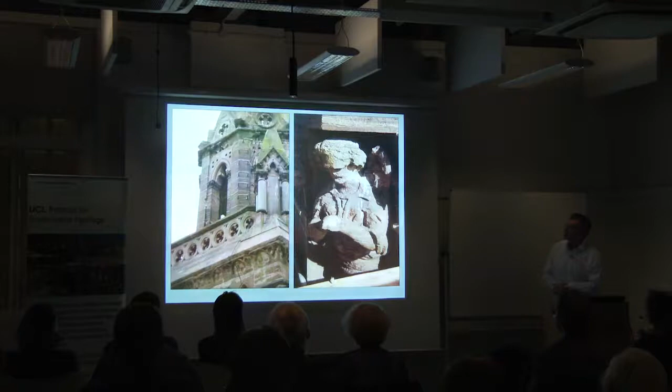And that was the state of the clock tower when we started work on it in around about 2000 or so. A lot of it's still that same Scrabo sandstone eroded away really, really badly. So we gave Albert a bit of protection just to keep him safe while we were working around him. Albert is Portland limestone actually, and that Portland limestone by comparison kept its carved detail and kept the sharpness very well. But we had to put back a lot of the detail on that which is gone.

So nearly all the carved stone that you can see here is new stone going back in, replicating the original stone, because that detail had been lost. But when it came to the main shaft of the stone, that's all the original stone within the building. And again, that was cleaned, repaired, and treated, and was fine once you went back beyond a certain surface. And again, that was subject to testing and trials for over a year before we actually started work. And Albert got his hood back as well to keep him dry.

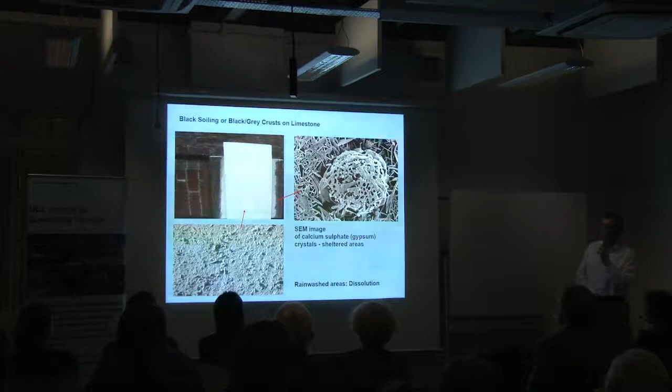And of course, different things happen to limestone, and where it's washed by rain, it tends to stay clean. In the rain-washed areas, you get a dissolution, so the surface gets pitting and worn, but it tends to stay clean. But you get these calcium sulfate or gypsum crystals growing on the sheltered areas where it's not being rain-washed off, and this sort of typical blackness is gypsum.

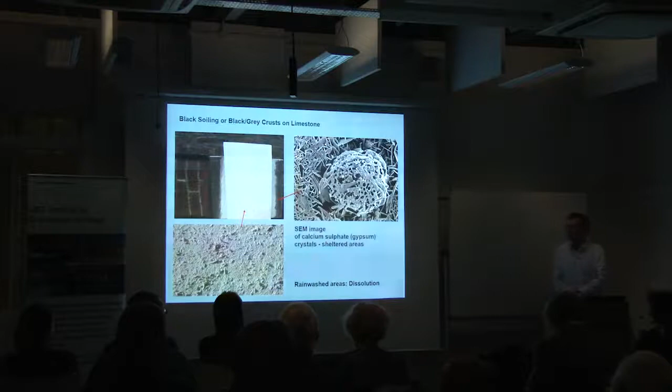And Belfast is not unique by any means, but it does have some local characteristics, and there's other cities around Britain and Ireland that have the same, but we have obviously heavy industrial pollution from the mid-19th century onwards. It's on the coast, so you get marine salts coming in as well. And then because it's also in a dip between two groups of hills, in winter in particular, you get anticyclonic high pressure systems with the air sitting still and not moving at all. And the combination of those is fairly extreme weathering of the stone.

And I'll not pretend to understand the science behind all of this, but this is broadly speaking what's happening to the stone. So effectively, it's sulfur dioxide, which is in the pollution. It reacts with the calcium. The calcium can either be in the stone or in the mortar as well, forming calcium sulfate, and that's the black crystals that you see on the surface of the stone.

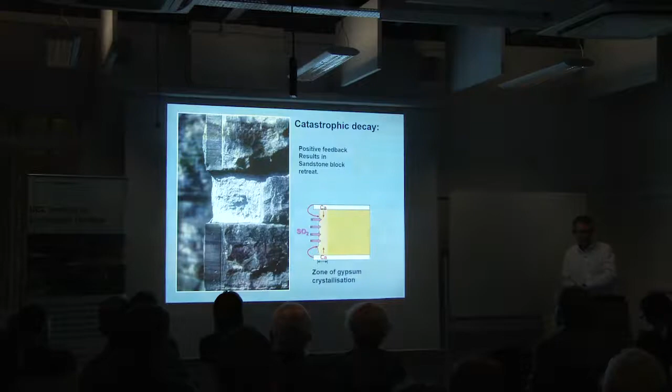And you get crystallization of that, which then starts to cause damage, and eventually that surface breaks away from the front, leaving a depleted area behind, and then you get fairly catastrophic weathering of that depleted area, and it sets up this cycle of damage. And it doesn't happen to all stones, but you typically get some stones which just keep weathering away, whereas other stones around them can be fine. So it can tend to have this sort of catastrophic retreat. And all this happens in very different ways in different areas.

So in rural areas, by which we mean a clean environment where you don't get the same atmospheric pollution, it tends to be just a gradual weathering, erosion of the stone, a gradual eating away of the surface, but not the catastrophic sort. The urban polluted area, that's where you start to get the black crust, the black crystals, the gypsum forming on it.

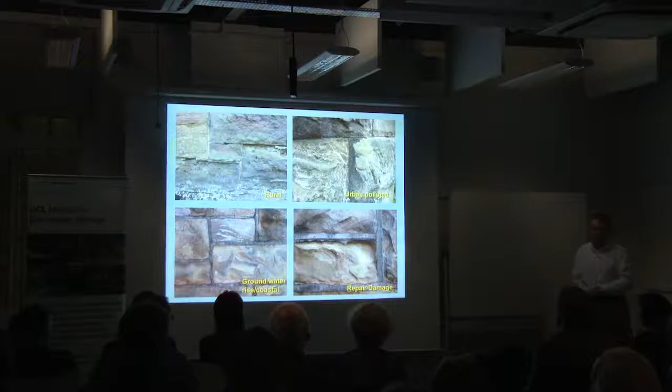But nearly one of the most typical types of damage that we deal with is bottom right-hand side, and that's where for many years, certainly from the 60s, 70s, 80s, even quite recently, people have been repointing buildings in hard cement-based mortars, mainly because they thought they were doing a good thing. It wasn't as if people were deliberately setting out to damage buildings, but it was seen as a way of protecting the buildings, to repoint them in hard mortar.

Quite often in what we call ribbon pointing, so a sort of thick layer of mortar behind it. And there are buildings all around the country which have been repointed like this. The softer the stone that they're repointing, the worse the damage is, but the damage is pretty catastrophic, really.

Because what happens is that the moisture within the stone and within the walls, and I'm going to talk a bit more about that in a moment, quite often comes out through the joints rather than through the stone itself. If it can't get out through the joints because you've got a hard cement mortar on it, more of it comes out through the stone, and therefore you get more of that breakdown of the surface of the stone as you get movement of water through that.

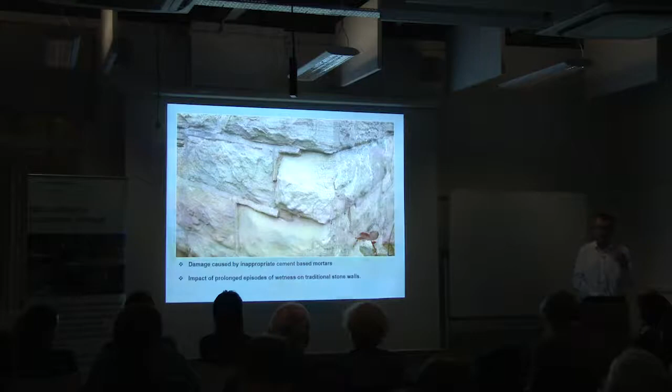And up and down the country, you will find walls like that which have been damaged by good intent, if you like, by people thinking they were doing the right thing, but in fact making it worse. And it still happens today, despite all the information and knowledge about it. You still see walls being repointed in hard cement mortars.

There's another typical sort of weathering that happens, in particular with these iron-rich sandstones. Giffnock is a Scottish stone, very heavily used throughout Scotland, but also a lot of it imported into Ireland and used there as well. And under acidic conditions, which of course again is polluted environments, the iron is mobilised to the surface. As it's doing that, it tends to what's called case harden this surface. It's iron oxide in the outer layer.

It's also characterised by staining of the stone, this sort of orangey red staining, and then you get this weakened layer just below the surface as well. In the thin section view below, you can sort of see what's happening to the crystals in the stone. And that again is very typical of sandstone weathering in polluted environments.

And this is, I suppose, an extreme example of it. The building we restored about 15 years ago now. You can see that complete breakdown of the surface of the stone. And there were choices in this case where we either replaced a large majority of the stone, or in fact, what we did was actually redress the original stone back beyond that depleted layer. So we, if you like, took a shaving off the face of the stone. We had to replace a lot of the carved elements, but the main bulk of the stone is still there.

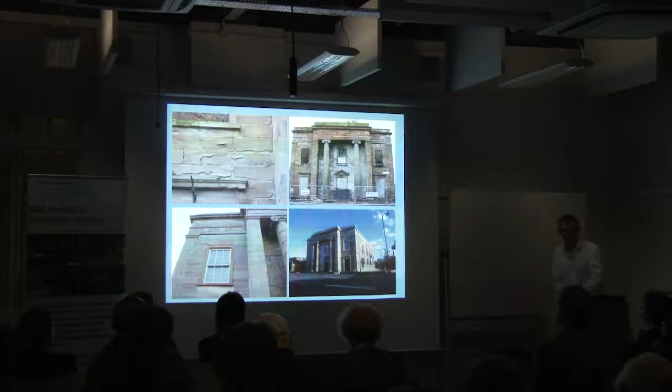You'd never describe that as really good conservation practice, but when you get extreme decay like that, you're really left with a choice of either replacing a lot of the stone or redressing the stone back. The building's back in use again as a school library, in fact, and keeps the water out as well.

And I suppose those are all early projects, but every one of them had an input from Bernie and his team into making decisions about what to do in each case. And at that stage, we were focused very much on the weathering of the stone and how the stone performed in the environment. And out of that came this project, the Northern Ireland Stone Database, which was our first KTP, between Queen's University and ourselves.

And really the purpose of that was to get information out to the public and out to the industry about what we were actually dealing with. So this is still now, 15 years later, a live database. On it there's details of every stone building in Northern Ireland, what the stone is, how that stone performs.

We also looked at all the quarries where that stone came from, both local quarries and imported stone as well. It's all linked together by stone type, by geographical area, by the architect and that. And the purpose of this database was really so that people understood what they were dealing with when they came to it. So if you started to work on a building, you had a source of information to know what the stone was, how the stone weathered, where you could get replacement stones, what were the suitable replacement stones when you couldn't get the original.

And that's been running now for the last, say, 15 years or so. And tied into that was the book that Joseph mentioned at the start, which is this one, which is intended really as a field guide for people working on stone buildings. Again, the purpose of this is recognition that a lot of people, architects, surveyors, builders, they were described as practitioners quite often, but we get hired for a job, and you go along, you do this job, and you're quite often under pressure from time.

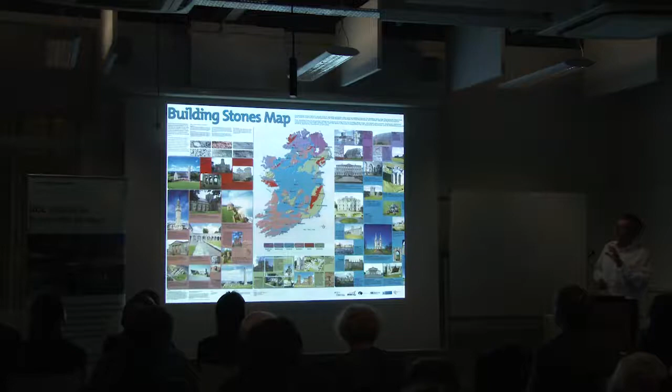And tied into that, this was another sort of side project, which was really back to this idea of linking geology with architecture. And this was a poster done for schools and universities at the time. And this was this idea that if you look around the historic fabric, it is a representation by and large of the geology underneath you. Not always the case, of course. People who had enough money imported stones from all over the place. But in most cases, the underlying geology is reflected in the architecture, and that link is so often lost as well. So part of this was encouraging quarries to reopen, stone to be used, and I'll talk a little bit about that later on.

But as I say, in the first number of years, we were concentrating really on this weathering process and the breaking down of the surface of the stone and what's happening and how to repair that. But as we went on, it became clear to us, and we probably should have picked it up much earlier, that really water movement through the stone is actually the crucial thing in all of this. And understanding how water moves through a building's fabric is actually crucial to understand how that building is going to weather, and also what you do with it to repair it as well.

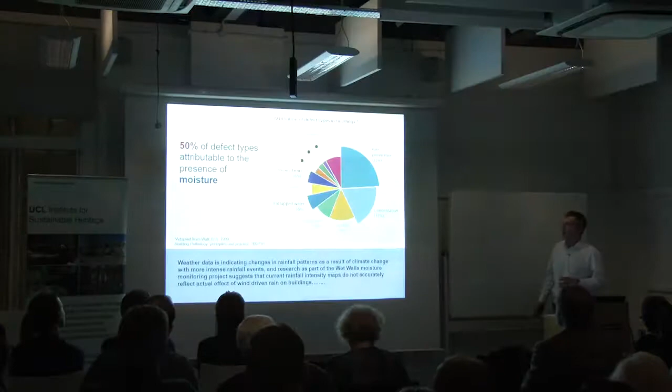So for the last 10 years or so, we've been focusing more on this idea of water movement. And part of that is because that's why buildings go wrong, they leak. And most of the things that people complain about are the fact that water gets in to your building. So 50% of all defect types in buildings are to do with water getting in. So that's the sort of background of why water movement is important.

But it's also, I suppose, been doubly important now because climate change is happening. It's real. We can see it. And one of the effects of that is greater intensity of rainfall events, tied in quite often with greater wind speeds as well. When we look at the weather data for Northern Ireland in particular, the actual total amount of rain falling isn't necessarily changing that much at the moment, but the intensity at which it hits buildings is increasing, and that is having dramatic effects on buildings.

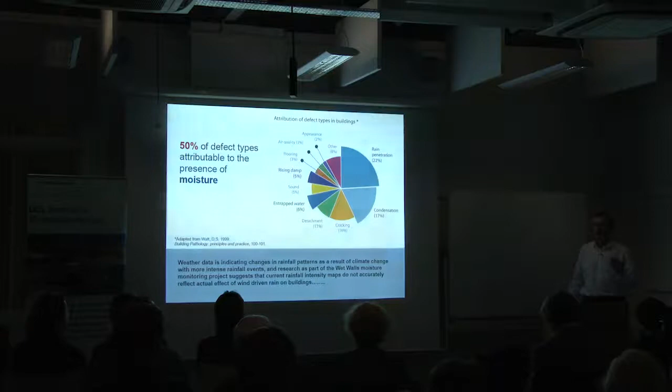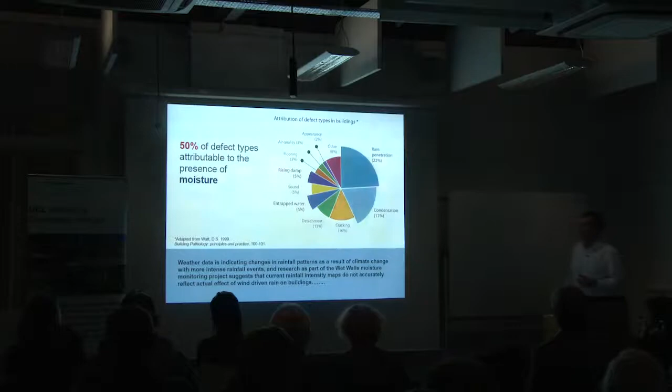Buildings which have never leaked before, historic buildings, are now leaking. Water is getting through, and new buildings are suffering from that as well. So we've been involved again for the last 10 years or so in more and more projects to do with trying to understand that process of water getting through, and that's what Scott's working on at the moment, is one part of that.

But leading up to that, I suppose, there's pretty obvious things about water, and as a country, we're incredibly bad at maintaining our buildings. Probably the single most important thing we could do to stop water getting in is proper maintenance of buildings, cleaning gutters, repairing eaves details and things like that.

But where water is concentrated, and these are extreme examples, obviously gutters overflowing, but even just in areas where water slows down on a building, as it comes down the vertical slope and it goes on to a slope, and there's many architectural details where that happens, you can see what's happening. The water is slowing down, the water is staying on the building, and it's getting colonized in this case by algae.

In some cases this is just aesthetic and doesn't really do much damage, but in other cases obviously vegetation growth can lead to it, and it's a sign that stone is staying wet, and as it's staying wet, there's more likelihood of the water getting in the buildings. So the primary focus really in any work to a building is actually getting the water off it in the first place.

When we're replacing gutters now in buildings and repairing gutters, we're making them bigger than they used to be because gutter sizes need to increase because of the intensity of rain. And I would say at the moment the gutter sizing tables for buildings are out of date because they're not really based on accurate weather data about rainfall.

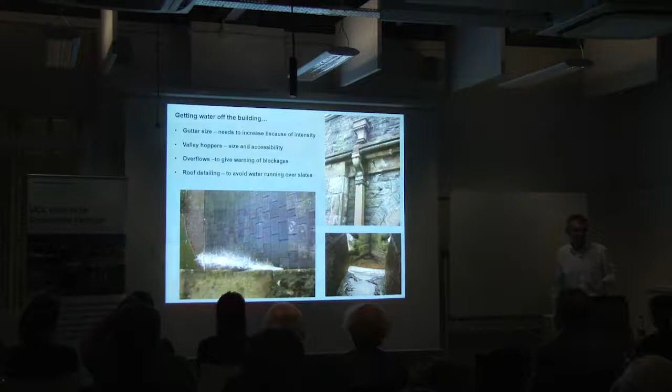Making them accessible, so getting rid of bends like that, making them accessible so that you can clean them out, that they stay cleaned, putting in overflows to make sure you get a warning of blockages where they occur, and detailing the roof so that you don't get concentrations of water running off in places.

I suppose this is really, put this in an example. This was actually a building that had been chemically cleaned and was pristine clean. And within a year, that had happened to it. So the owners weren't too pleased. It wasn't one that we cleaned, I'm glad to say.

But this was because it was chemically cleaned, it hadn't been properly neutralized after cleaning. There were nitrates left and fertilizer effectively left on the building. Along came the water, all this detail, and it grew a little green skin all over it. And that took about a year after it was pristine cleaned.

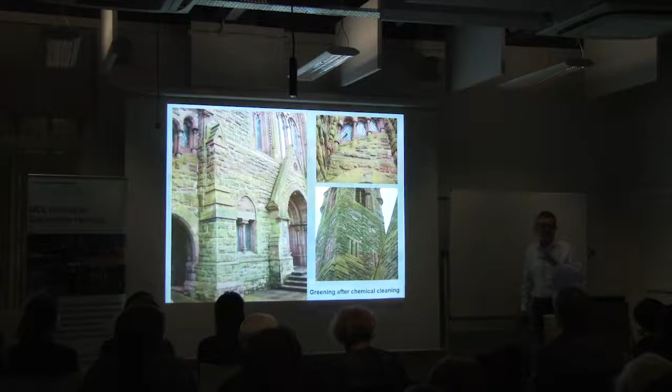So water has an effect, but probably more seriously, water can have a devastating effect on the internal fabric of the building as well. This is another building which had been closed up for some years, and through a combination of a really complex roof, gutters being designed by the original architect not to be visible in lots of cases, so really contorted ways of getting water off a roof, which then blocked up because either the architect or the client didn't want to see the rainwater goods in places.

Combined with lack of maintenance, the building was closed up, nobody looking at it, and pretty much the whole of the historic interior had to be ripped out in the end through rampant dry rot taking hold within the building. Dry rot obviously happens when you get a combination of moisture, lack of air movement, and the food source, which is the timber, obviously. And it can be utterly devastating for a building.

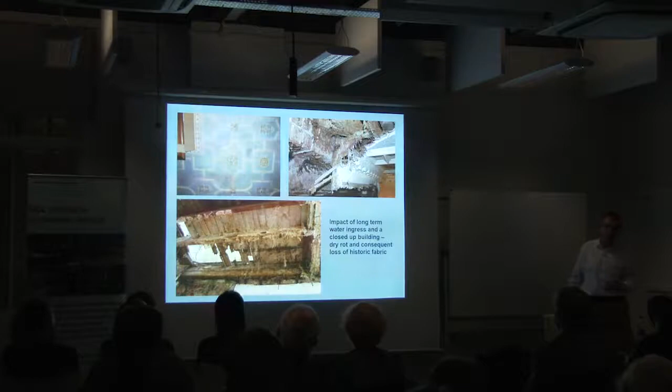In this case, this was a full historic interior, which within 3 years of the building being closed up was lost completely through water. And that started from water getting in from leaky gutters, travelled through the building, a combination of lack of maintenance and nobody looking after it, and the whole of the interior was lost in a rapidly short period of time. So keeping water out is pretty important.

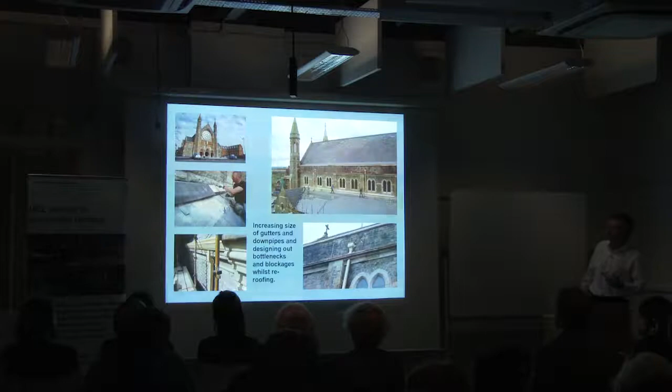So every time we're working on a building now in terms of re-roofing it, we're increasing the size of gutters, we're increasing the size of the downpipes, we're trying to get rid of bottlenecks, and we're also using more and more flashing details like this lead flashing in the bottom right to get the flow of water off the building.

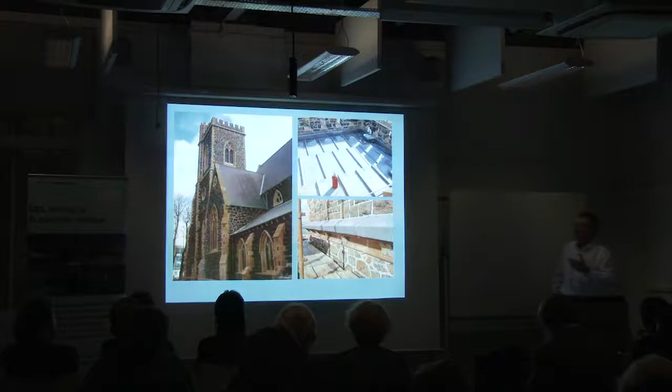So designing out ledges and things. And some of this you can argue about architecturally because you're quite often changing the aesthetic of the building. But what we're trying to do is get the water off the building as efficiently as possible. So lead flashings on gullies, lead flashings on parapets, over cornices to get the water off the building.

And the reason we do that is because we're finding that with that intensity, and particular intensity of wind-driven rain, we're finding that water is penetrating through even historic stonework, which hasn't leaked before, but quite often when you start going into it, you find it's always leaked anyway, or there's always been a bit of water, but you're getting more and more water getting through.

And sometimes repointing of the building, which is nearly one of the first things you do, because you go along to the building and the mortar's crumbly, so repointing is one of the, if you like, standard things you do. Sometimes repointing the building can actually make it worse. Because water always gets in. You have to assume that in any masonry wall, water is going to get in somehow.

And it's partly because buildings move. You're always getting thermal movements. You get shrinkage cracks around mortar joints. So mortar may be filled when you put it in, but it'll shrink back very slightly. Buildings move. The smallest of hairline cracks, wind-driven rain will get into it. So you have to assume water is going to get in.

So if the water can get in and you've repointed it, especially if you've repointed in too hard a mortar, you're actually encouraging the water to go into the wall and through the wall rather than back out through the surface again. So sometimes repointing, that's not saying you don't repoint, because quite often you have to, but sometimes you can be driving the rainwater in further through the wall.

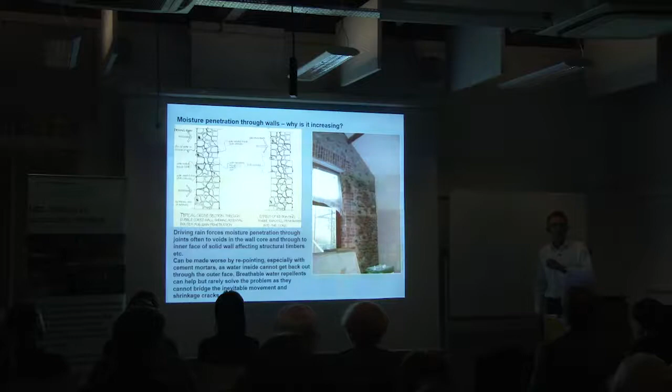But secondly, they don't bridge cracks. They don't bridge those hairline cracks that we're talking about. So again, it can be part of a solution, but it's not the answer in many cases at all, because water still gets in to the building as well.

Again, quite a few years ago now, with Queen's, we were involved in this project where we built some walls in the wettest part of Northern Ireland. You've got an average rainfall of about 1.5 meters, so that gives you an idea of how wet it is out here. And we were taking new stone walls, embedding moisture sensors within them at different depths, and then setting it up with a weather station to see what happened.

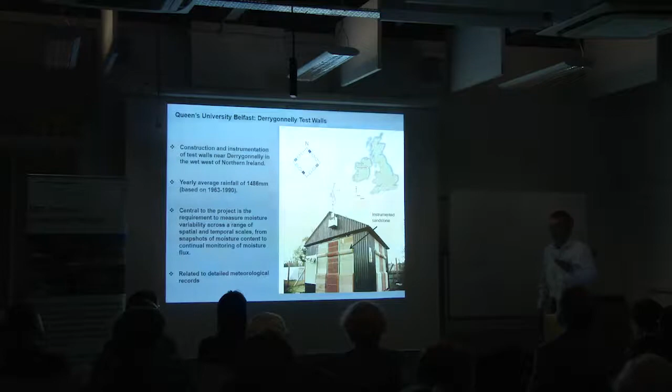Now, what we're expecting to happen, and what conventionally happens, is that sandstone in particular gets wet to a certain depth, and then when the rain stops, dries out again back to the surface. That's the conventional understanding. So we set this up, and it ran over the winter of 2010. And we were measuring the moisture content at different depths within the stone.

And if you think about that, 250 mil back, so that's that much back from the surface. In most stone walls we're dealing with, the facing stone will not be any deeper than that. Quite often, the typical stone wall, if you like, you've got a facing stone, 200 or 300 mil. You've then quite often got a rubble core or a gap, and then you've got another stone brick lining or something on the inside. So what we were finding in this, admittedly it was west of Ireland and it was raining a lot and we're getting strong winds, but what we were finding was we were getting full depth penetration of the wall, and it was staying wet. It wasn't drying out at all.

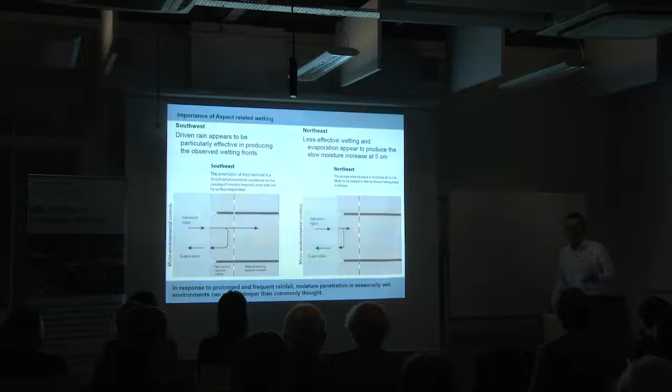And that, I suppose, is what we're seeing more and more now, and it is partly to do with climate change and intensity of rain and wind-driven rain in particular, but moisture penetration is extending much deeper into walls than traditionally would have been thought. And so you're getting this change of thinking: it's not a surface phenomenon, it's a full depth wall phenomenon in terms of what's happening to this water, and we need to start thinking about how the water is then moving in the depths of the wall.

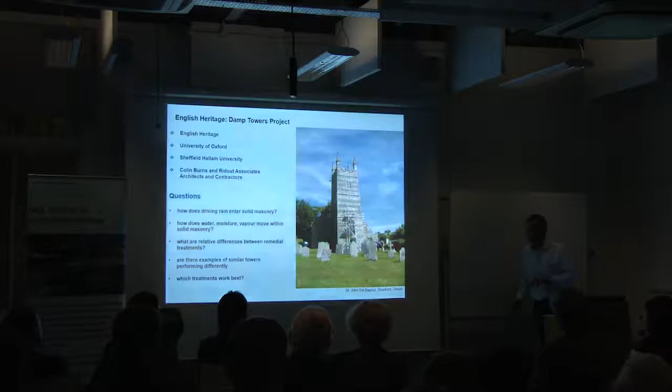This is not our project, but I put it in because it is relevant as well, and there's lots of people looking at this. So English Heritage ran, and there's still some outcomes of this coming out in terms of further research, a few years ago now, what they call the Damp Towers Project, because they were also experiencing this in the southwest area, they were looking at Devon, westerlies again, and the questions they were trying to understand were: how does the driving rain enter the masonry? How does it move within the masonry? And they were then trying different treatments and repairs for that. This was a very interesting project, and a lot of learning came out of it. But as always, when you do these things, it asks more questions and sets off new trains of research.

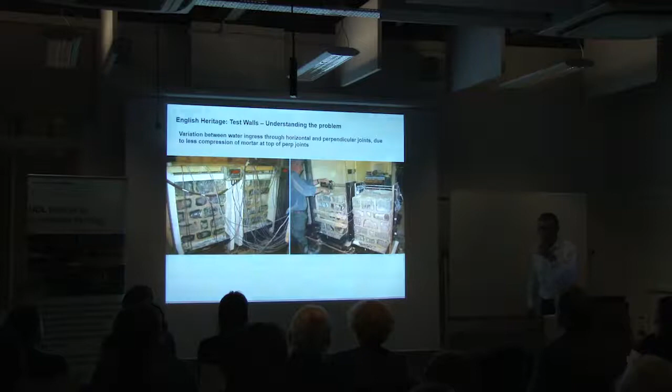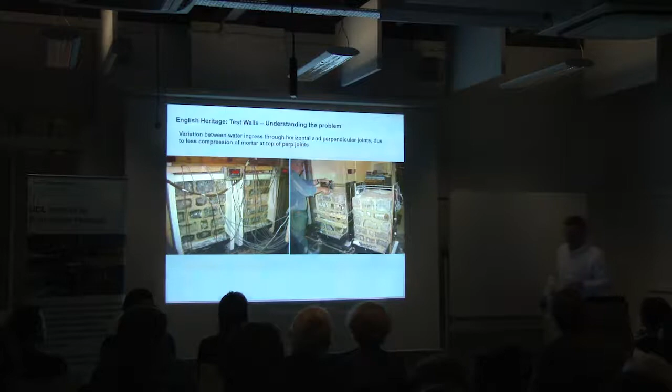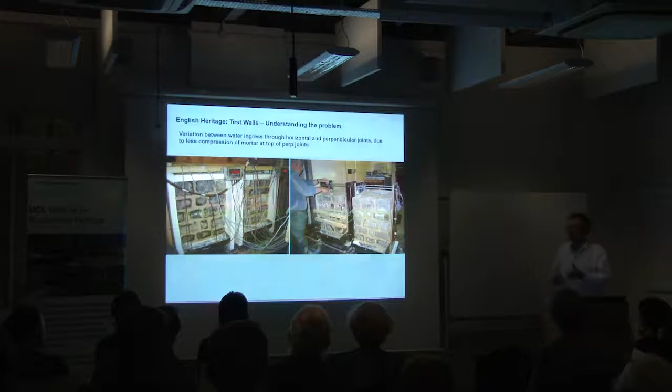As well as looking at real buildings, they also set up lab experiments looking at moisture movement through test walls, if you like. One of the things coming out of this, which I suppose we hadn't really thought of before, but it makes perfect sense when you think about it, is that at the top of the vertical joints, or what we call the perpend joints, and it's even more pronounced on tighter joints and brickwork joints as well, because it's very difficult to pack those tight, the mortar on the top of those joints tends to be looser and not have the same pressure on it as it does in the horizontal joints where you've got the pressure of the next course.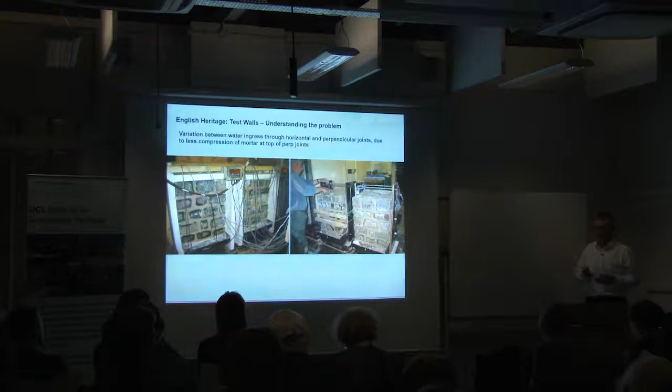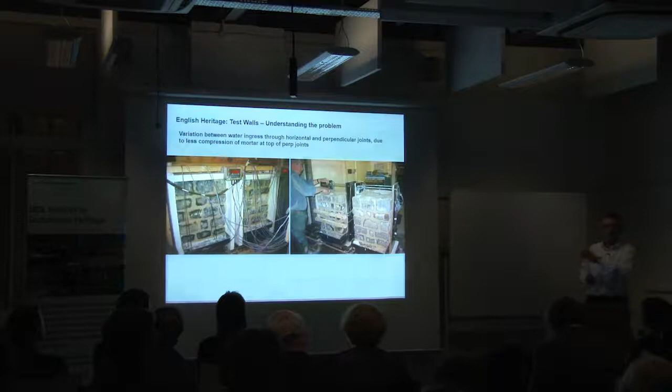Looking at how do you deal with that, one of the most effective ways, if you can do it, is you render your wall. So you plaster your wall, and that solves the problem. Unfortunately, we've got very large numbers of very nice stone and brick buildings where it's not really aesthetically acceptable to render them. But that's why traditionally in a lot of West Coast areas the walls have been rendered. And render is a very, very effective way of keeping water out.

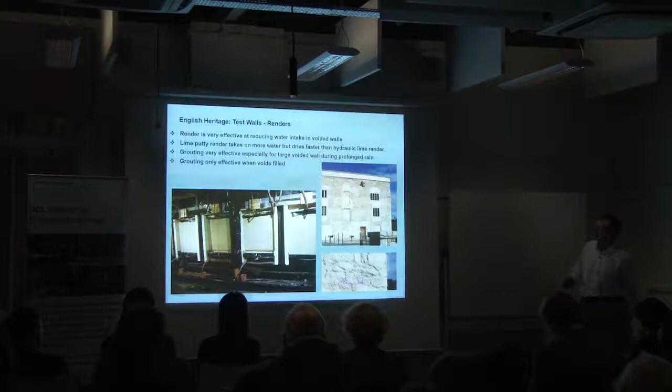And it can be full renders, or even this is a building we did in Old Castle, which we rendered. It's a Harling, a very light lime-based render, but it stopped the water getting through as well. And you can still read the stone patterns behind it, but it was very effective at stopping water.

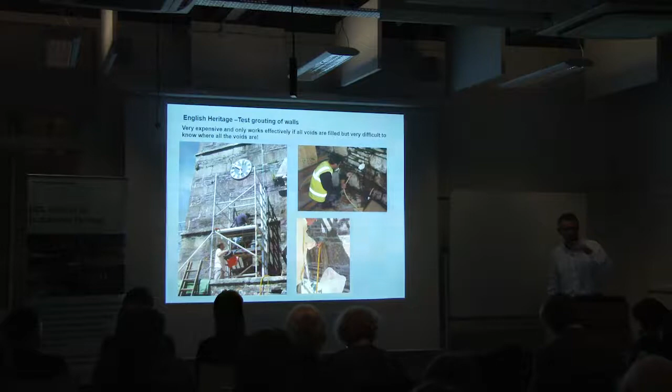We also did a full-scale experiment at grouting walls, in other words, filling all the voids within the wall. So what you're doing here is acknowledging that the rain is getting through your first bit of stone, and then it's finding its way through the porous center part of the wall, and then into the inside. So the English Heritage experiment was you grout this wall. This is incredibly expensive to do. If you imagine within a 2 foot thick stone wall, you're trying to find every little void within that and fill it full of a lime mortar, incredibly expensive, and also really difficult to know whether you've actually got all the voids or not.

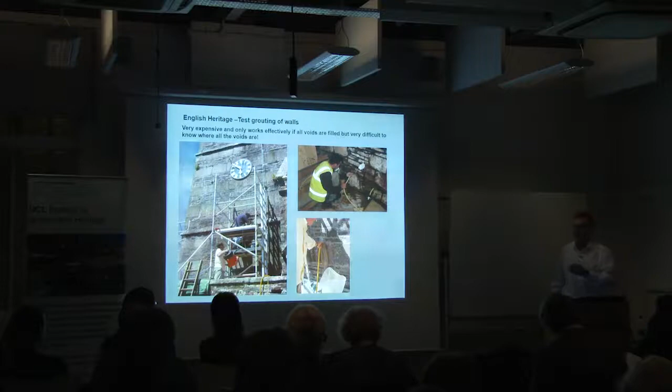And so I think their outcome of this was that, in most cases, it's not really a practical day by day solution because it's so expensive, nobody can afford to do it, and it doesn't even guarantee to give you the results either. But it was an interesting experiment. They were working down in Devon, and you probably noticed the stones of those.

There's particular difficulties with impervious stones, and we have the same difficulties with basalts on the left, granites, and very hard limestones. There is no porosity in these stones whatsoever, so you don't get that sort of stone getting wet and drying out at all. Everything is happening in the joints and in the core of the wall. And a sure sign that you've got a problem in your building and water in the core is when you start to see any of these things happening: moss growth in the joints, plant growth in the joints, calcites leaching out and stalactites forming on the outside of that.

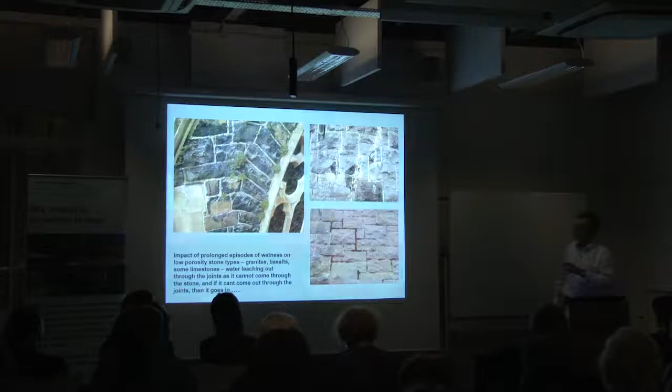If you see that, if it's been happening for a while, the core of your wall is probably washed out. You've probably got big voids because a lot of material has been washed out. There's been water getting into the core, trying to get out through the joints, quite often going inside as well. But you've got a porous core within the wall with a lot of water getting in and down through it. Quite often what people do to that is they slap a load of sand cement render on the inside, and then they put a bit of beauty board over it to hide it for a while. And that works for a while.

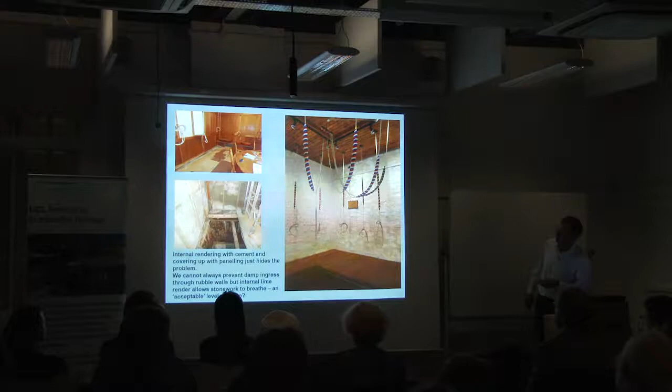This is a church we repaired. Top left is the beauty board. We stripped that off, and there was mouldy, dry rot-ridden cement render on the inside. So we stripped all that off as well, and effectively just lime washed the inside of the wall, tied in with repointing on the outside.

But that doesn't actually stop all the damp getting through. So the question is, and we quite often ask our clients, is there an acceptable level of damp that you're prepared to put up with? And you deal with it by ventilation or a little bit of heat, keeping air movement through the building.

In this case, it was a bell ringer's loft, so they didn't mind. They were only up there once a week, so they didn't mind too much that it got a bit damp. But to try and stop that completely getting through would have been enormously expensive for them.

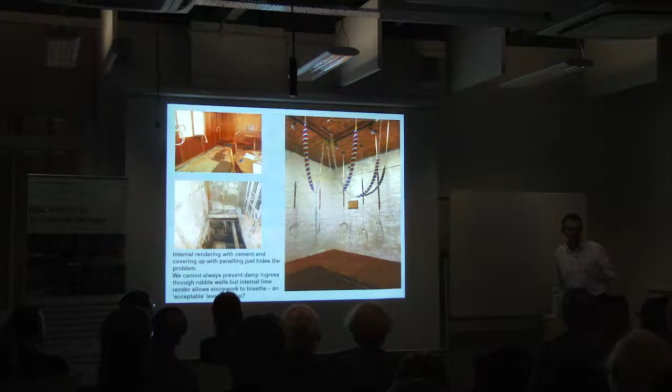But all of this, I suppose, is leading up to this thing of, well, how do we understand what is happening to this water within the walls? So we now know that there's water penetrating through the walls. We now know it's moving through the core. It quite often comes out somewhere completely different from where it's gone in because it's moving through the core. How do we start to understand that to know how to treat it?

And that's a lot of what current research is doing, and the person who's doing that research is here in the audience tonight, Scott. And what this is about is the next stage of trying to understand how we can assess how water is moving through walls, and then once you start to understand how it's moving through walls, then you can start to realize what you do to treat that.

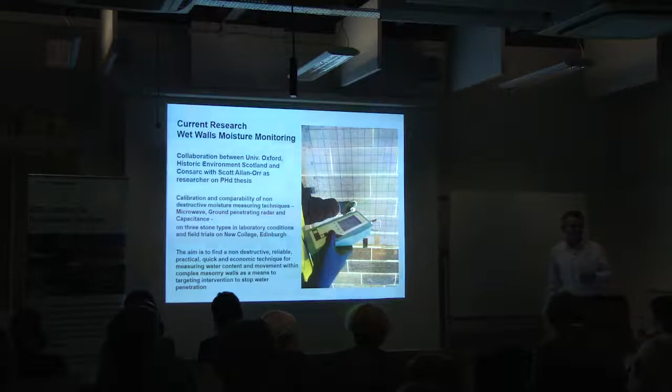So what Scott's been looking at is ways of measuring the moisture in the depth of the wall, non-destructive ways. In other words, not drilling big holes and sticking in traditional moisture meters, because quite often in these buildings we can't drill big holes.

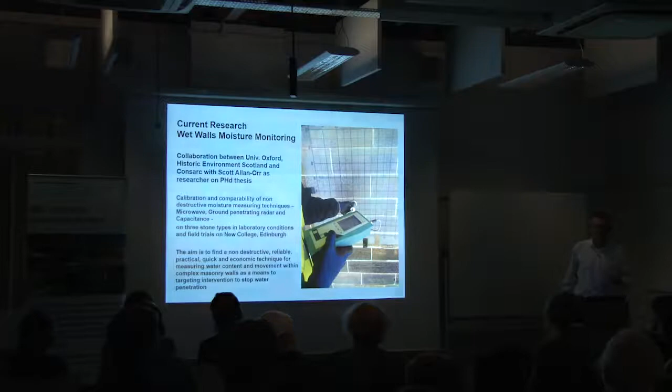But non-destructive ways of measuring the moisture content in walls, and therefore being able to build up a pattern of that within the wall. So what this is about is finding, and it's a big, long, ambitious challenge there for Scott, a non-destructive, reliable, practical, quick and economic technique for measuring water content.

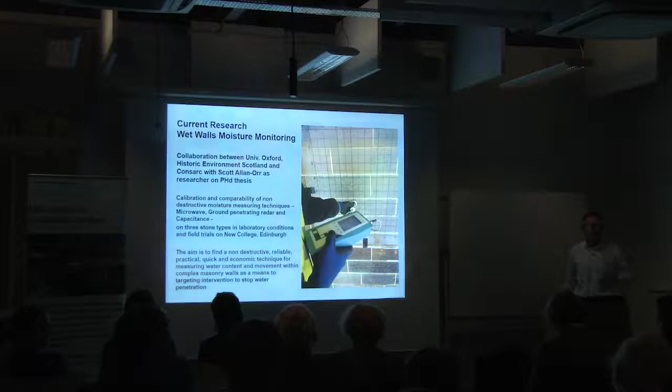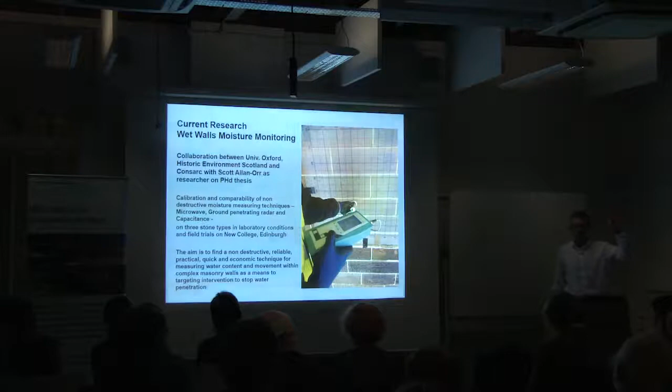So the sort of holy grail of this is, if you like, something that a contractor or a surveyor can use on site, and we can track the movement of the water through it, and by finding the pattern of water movement, find maybe the source of the water getting through, and find how it's getting through the depth of the wall, but also moving down through the wall as well.

And this is Scott working away last year on New College in Edinburgh. What we tend to do is use our buildings as guinea pigs for these experiments. In this case, a University of Edinburgh building, very willing to help, very keen to help. We were on site repairing, repointing, cleaning the building. So the scaffold was up. So that gave a test bed for Scott to come along and

experiment, in this case with a microwave measuring device, and then with ground penetrating radar. Scott, am I right? Yes, good. GPR techniques on this. And what Scott is trying to do is look at calibration of those to see if you can compare different techniques and try to understand how we can get a practical way to measure moisture content, not on the surface, but in the depth of the wall. Well, the surface as well, but in the depth.

So Scott was spraying this wall with water to simulate wind-driven rain. It was inside a protected scaffold, so the normal environmental fluctuations were taken out of it. Scott was spraying it with water, and then in time after that, seeing what was happening to the moisture at depth within the wall. And it's still early days and it's still experimental, and there's lots more can be done on this, but it's producing really interesting results.

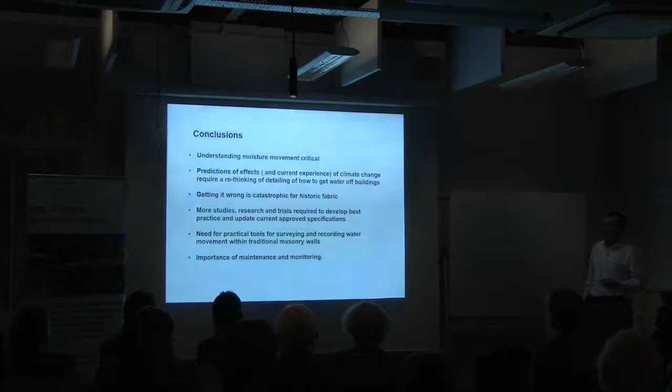And out of all of that, I suppose, is this thing about why, you know, where are we trying to get to in this? And really, what we're saying is that moisture movement is probably the single most damaging thing to our historic fabric, moisture getting into buildings. We know, we've seen already, there's greater intensity of water, so climate change is happening in terms of that. If you don't get it right, it's pretty catastrophic in terms of the fabric of the buildings.

But we're still a bit off in terms of trying to find really good practical ways of measuring, charting, recording that. Unless any of you know of somebody who's also busy working away and has discovered the new magic tool for doing this. But there's a lot more work still to be done, lots more potential for research. But it is going to become increasingly important, I think, in terms of preventing damage and solving damage to historic fabric.

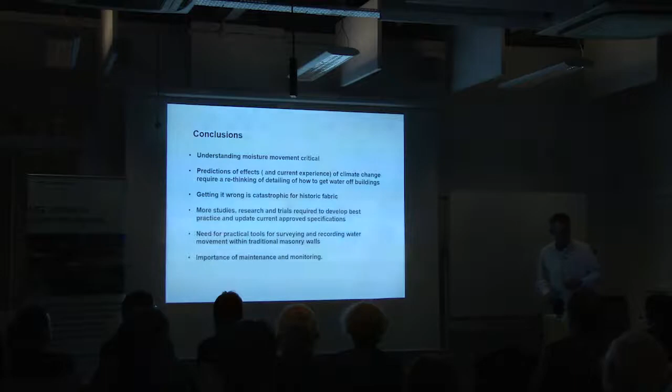I'm probably nearly up my time, but I'm going to keep going if you don't mind, wherever Stacey is, because I wanted to show you, I suppose, a bit about why we're doing this and what we do with that information once we get it. And I'll run through these a bit quicker.

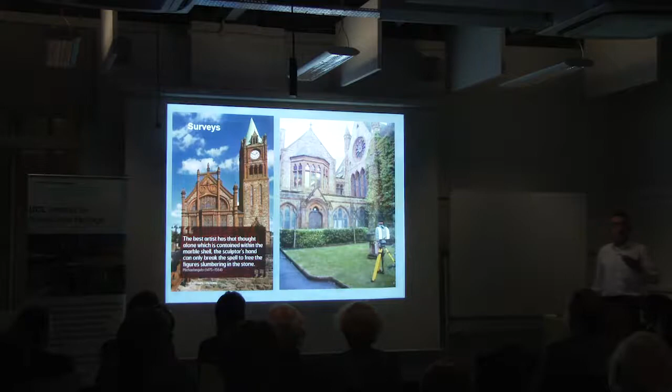And so, you know, what we're doing is repairing and conserving historic fabric, and we have to do it in a very, very detailed manner. So we start off with trying to get proper surveys of buildings now. And one of the great revolutions of the last 20 years I've been working is the ability to get, at relatively cheap prices, stone accurate, highly accurate, detailed drawings of buildings using LiDAR surveys.

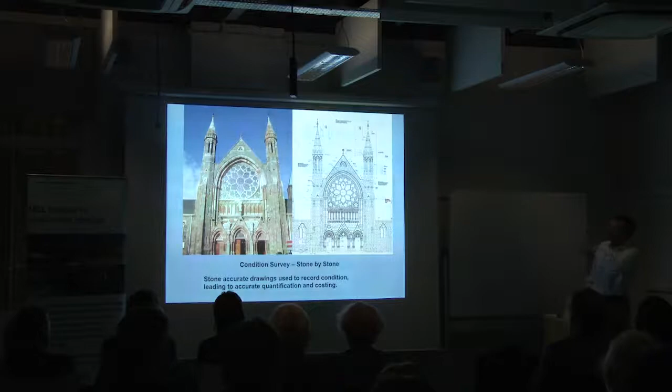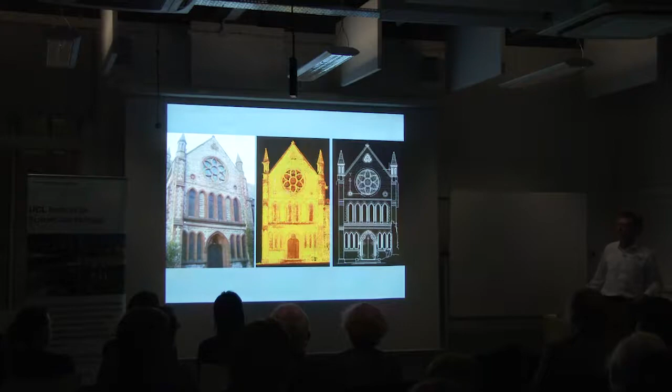And so we can get our building and we can start to produce drawings like this fairly easily. You can use the scan data. This is just a point cloud from scan to build up patterns, relatively easily and cheaply now. You can go from your building, your scan data, your point cloud, and then start to produce accurate drawings, again, relatively cheaply. And those are obviously highly accurate, highly accessible.

Handheld scanners can do this now for detail. Stonemasons are using handheld scanners on site for taking details of a stone to reproduce it. They can take the scan data, put it back into their CNC cutting saws in their works, and produce highly accurate replacement stones. So this is, I suppose, from the scan to the drawing to the cutting shed and producing the replica stones. And it can be done really accurately.

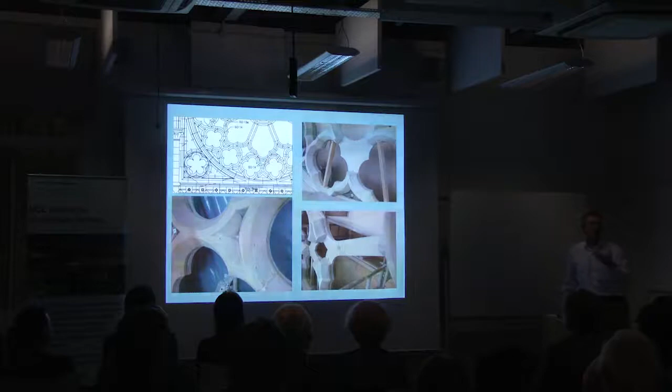Now, obviously, stonemasons have always been able to do it really accurately, but the important thing about this is that it actually makes it economic to do really accurately. So the cost of doing very good quality stone is, relatively speaking, coming down. And it's a combination of the scan information, the availability of materials as quarries open up, CNC computer-controlled cutting saws. You can take a lot of this sort of donkey work out of it, and that leaves the artist, sculptor for doing the fine detail and the carving later.

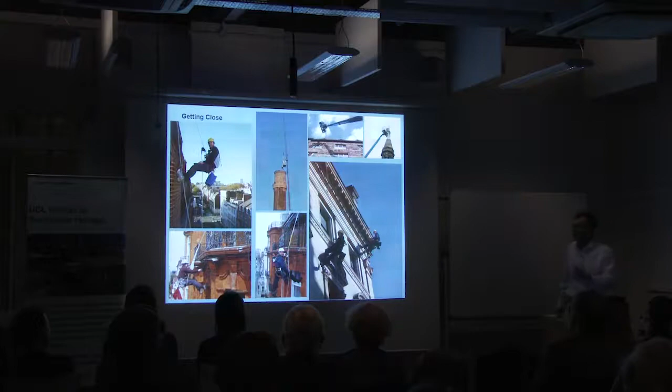But there's still, in our view anyway, no sort of alternative but to get up close to the building that you're going to be working on. And we do that, first choice, using cherry pickers, and scaffolding if available. Quite often we go up to look at buildings when we're in the early stages, because if you're not looking up close at it, you miss things, you can't see things that are wrong, and you get it wrong.

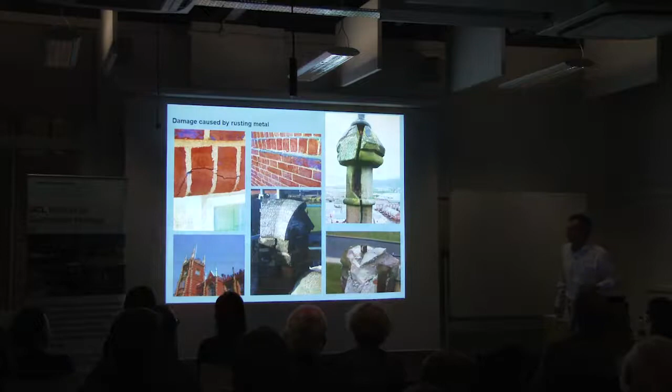And the typical things we're looking for, like on the right, the buried metal within the buildings rusting, blowing stones apart, blowing brickwork apart. It's very hard to see that from either scan data or from standing on the street or even with binoculars until you're right up close. Quite often you don't see what's going on. You get up close, and you can find, as we often find, that there's bits about to fall off.

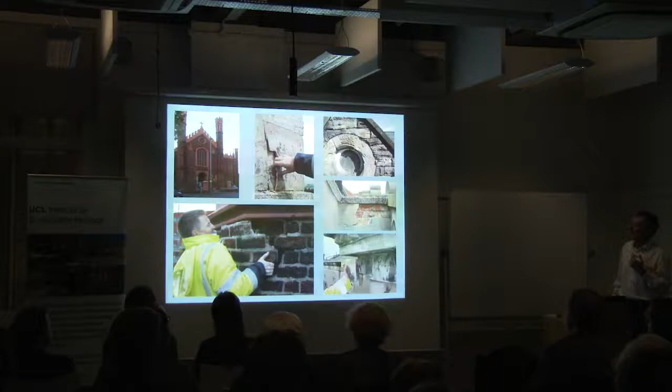And we quite often end up, when we're surveying, taking them off. But getting up close to a building is crucial on that. And that sort of leads into the work that we do in trying to repair and restore these buildings, moving from the drawings right through, and so that previous slide.

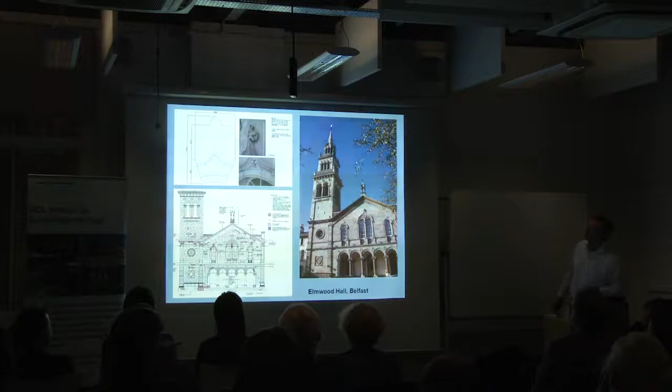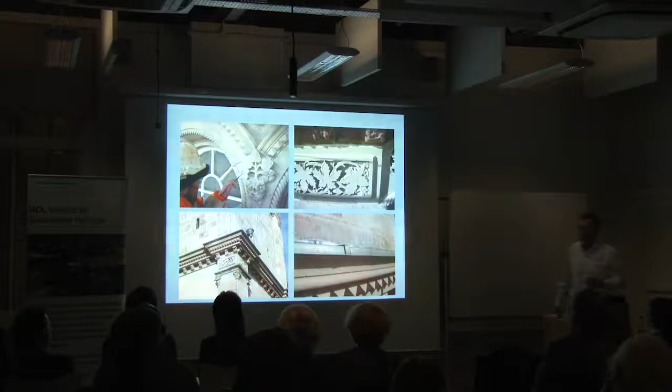So that's the building. Top left is the stone detail we prepared from the scan data, and that's the process, if you like, of going from the scan data, the original replacement stone, and the replacement stone being put back into the walls. And because of the advances of technology, that's now relatively economic to do, and because it's relatively economic to do, clients are more prepared to get it done and to repair buildings properly. So you get buildings being looked after, I think, more than before.

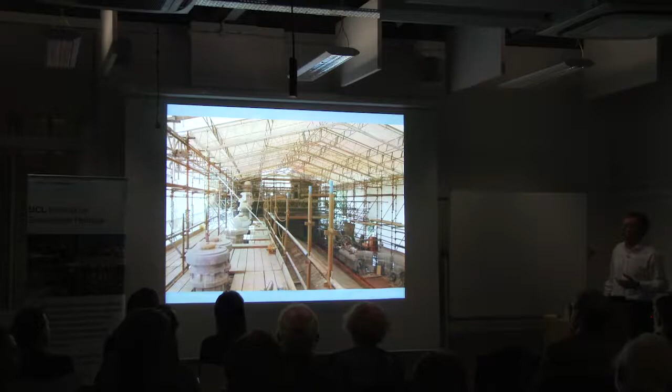It's fairly crucial in this that we try and create the right environment for doing the work. So most of our big projects now, we would go for a covered scaffold, or even ideally a complete roof over the building, because you're allowing the building to dry out. You're working in a controlled environment. When you're repairing a roof, you're not letting water into the building, particularly if there's an important historic interior underneath it. Again, the technology of this has been more cost effective now than it used to be in terms of these large span roofs that you can put over, and nearly always they're worth it because you can work through bad weather and you can get the right environment for doing the work within.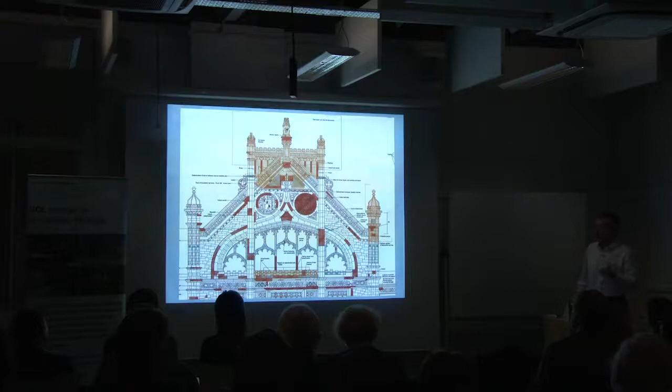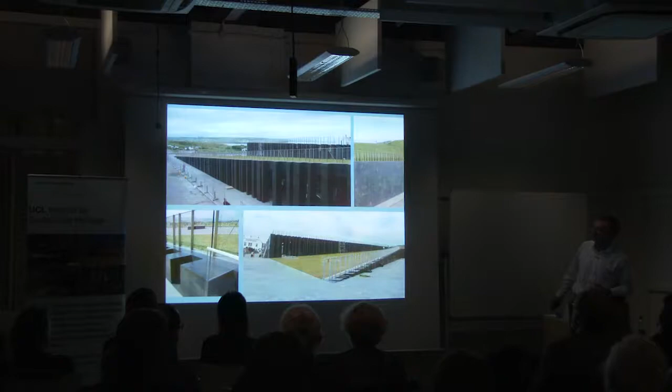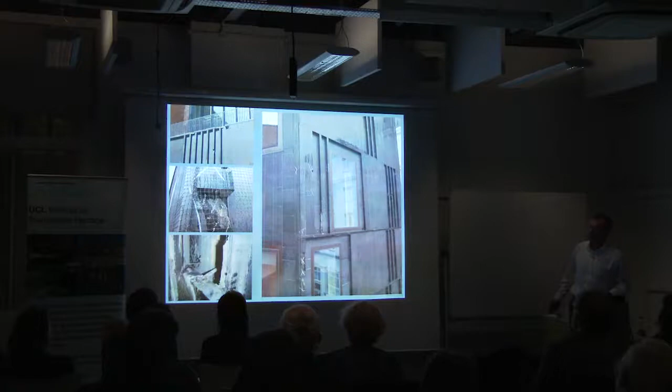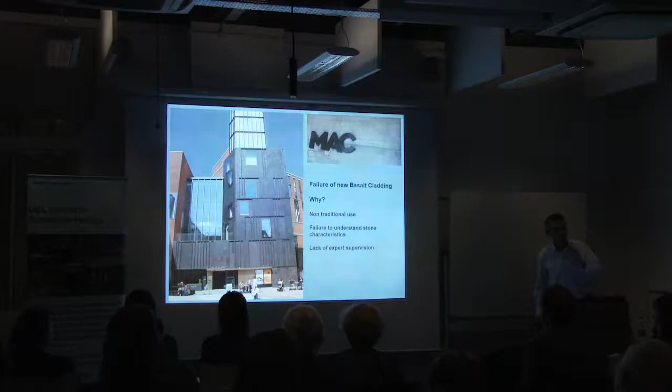I'm out of time, but I'm going to very briefly run through these because we've been involved as well in, we don't design new buildings generally, but we've been involved in selecting the rock for new buildings, and this was a UNESCO World Heritage Site, Giant's Causeway Visitor Centre, local quarry, very contemporary design, Heneghan Peng architects. But if you don't understand what you're doing, it can go wrong. And this was also a new building where the stonemasons, the architect and the contractor didn't quite understand what they were doing, and the whole of that facade is going to have to be taken off and replaced. So if you don't understand what you're doing, it's very easy to get it wrong in terms of stone selection, how it's put in.

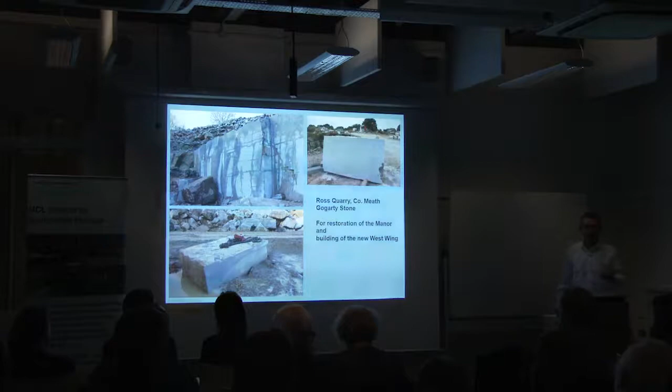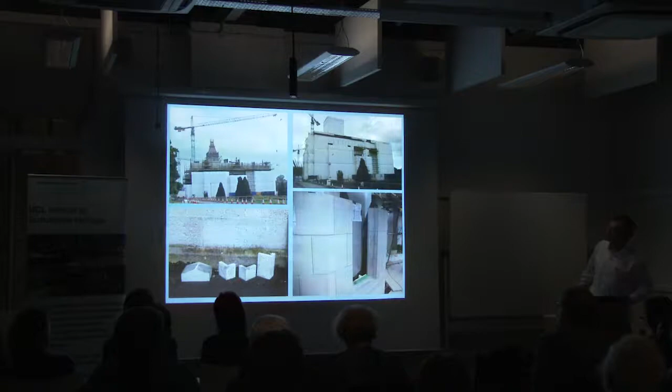I've run out of time, so I'm going to run through these very briefly. I want to show you again what we're involved with is trying to get quarries opened up again. So these are traditional quarries. The stone industry sort of fell into decline, but in two cases now we've been able to get involved in reopening quarries to produce, and these are both in Ireland, really, really good quality limestone, which has now been used on an extension to an historic hotel in Limerick, and this is all new. This is brand new limestone in a reopened quarry, and it's not cladding, it's solid stone masonry built by J.P. McManus, one of the richest men in Ireland.

But it's brilliant because this is reviving the industry, things like this going on. And this is all new built stonework, London-based architect. We were working on the stone selection side and finding the stone, opening the quarry. But it is a fantastic example of the capacity of the industry, again, reborn, and it's partly because of the value of it. So finally, why bother?

Last few slides, Joseph.

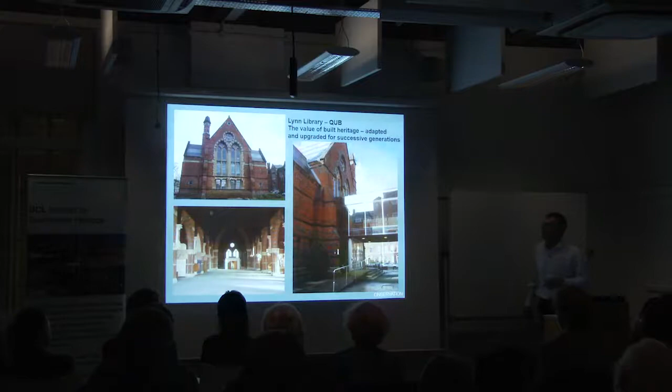Why bother? Because we have this fantastic built heritage that needs looked after, really. And all buildings get a bit sad and go into decline and things happen to them over the years, like this glass box being shoved on the side and disregarded and left to sort of moulder away. And locked inside them is a sort of fantastic heritage, and it needs looked after, it needs repaired, it needs to be restored and valued again.

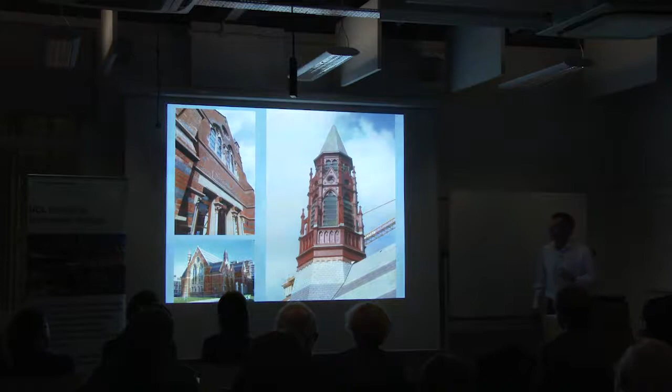And this one, a mixture of brick and stone, but a sort of understanding of all of that in terms of restoring the fabric, but also then in this case restoring the historic interior of it as well and bringing it back to life as well. And this is one of the buildings in Queen's University.

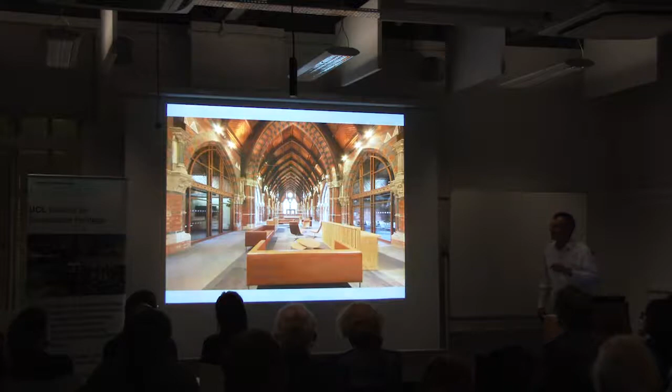And it's that bringing back buildings into life which is the heart, I suppose, of what makes all the work that we do interesting. But at the heart of that, I suppose, is understanding the fabric, the historic fabric, and understanding what you can do to restore these buildings, put them back into use, and, as I say, make sure that you're passing them on for another generation. Thank you very much.

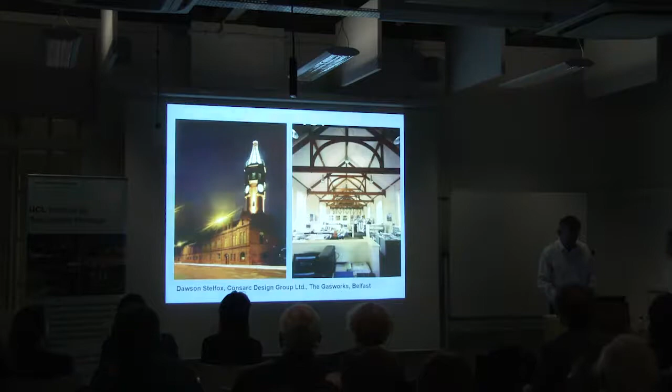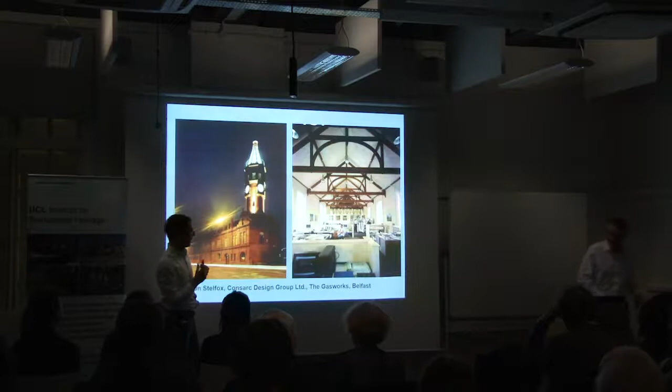And I've spoken for too long. I know I'm 15 minutes over my time. Sorry. I personally didn't have enough. I think a fabulous account of problems and some solutions. I learned a lot, and I'm sure there are going to be many questions. Please, when you ask questions, I would be grateful if you could introduce yourself and also mention your institution, if applicable. Any questions for Dawson?

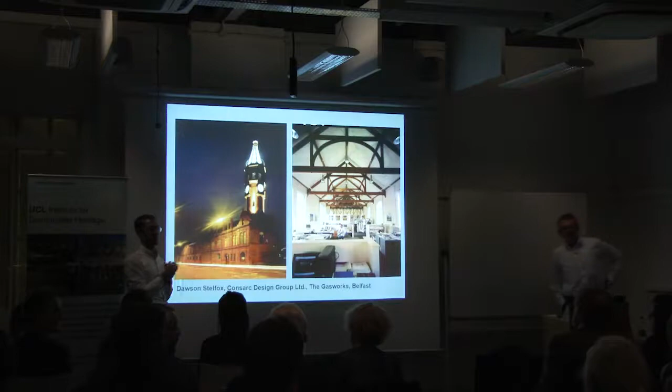Yes, hello, sir. I'm Shohini. I'm a student in this institute. In one of the slides, you showed us an example where you used the lime putty render on the exterior wall. Stone wall. Was that the original feature, or was that done afterwards?

So that building was a 16th century tower house, which had been rendered over with a cement render. But when we took the cement render off, we found traces of an old lime harling underneath. So we think it had been lime harled traditionally. And the stonework was not, if you like, posh stonework, it was rubble stonework.

So it was actually the Scottish Lime Centre, which some of you will be familiar with, came over, analysed that for us, and then they sent over a couple of their people to train up locals, because lime harling has gone out of use pretty much completely in Ireland. So the Scottish Lime Centre trained up some of the local plasterers, and then they replastered that with a breathable lime harling.

So we were pretty sure it had been harled originally or lime rendered, but it had all been stripped off, and when we found it, it was a very hard cement render on it. But that had all cracked and water was getting in and penetrating its way through. So lime harling is a very effective coating, but obviously for aesthetic reasons you can't use it everywhere, but it's very effective at keeping water out.

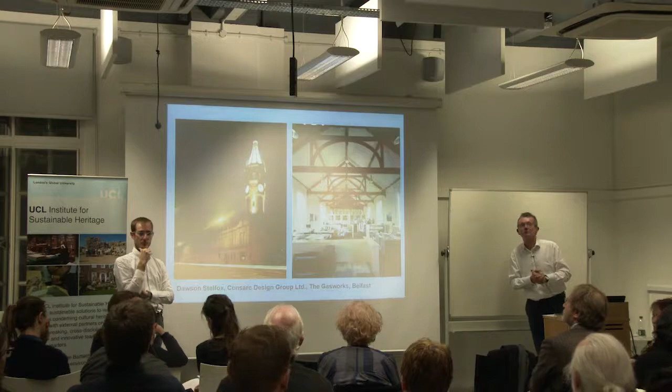I'm the director of the UCL Institute for Sustainable Heritage. Thank you, that was very interesting.

A lot of your images showed very decorative rainwater goods. Yes. And also that some of them may have been replaced in order to have rainwater goods with greater capacity. Yeah. Is there a halfway house in this? To what extent can they be adapted? And are we sacrificing a substantial amount of the significance of the building in actually ripping them out?

Yeah. Good point. In some cases, I suppose, we find that the originals are rusted and rotten away, and we're having to replace them anyway. But you're right, in some cases we have to leave them there, and we know they're undersized. So what we're doing then is building in elaborate overflows, so if you get a storm blast of rain, we're not expecting that to be dealt with.

It shoots out an overflow clear of the building. And that's another way of accepting that your capacity is not enough, but you're finding a way out of it. Because if you don't do that, it'll overflow, dribble down the building, or it'll go back into the building. So building in overflows is one of the ways to deal with storm surges and keep your historic fabric.

Yeah. Time for one last question.